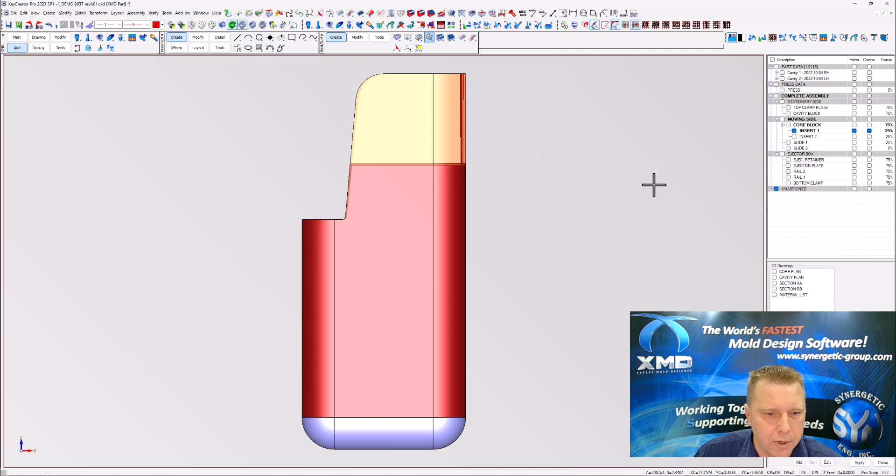I've got this little core insert here. So we're going to use smart water. We're going to add water down the middle of it. You know, it's an insert that needs to be cooled internally. We can't get water close enough around it in the core. So we'll place this right here, and knowing the smart water, I didn't use through smart water, so it stopped short as it should.

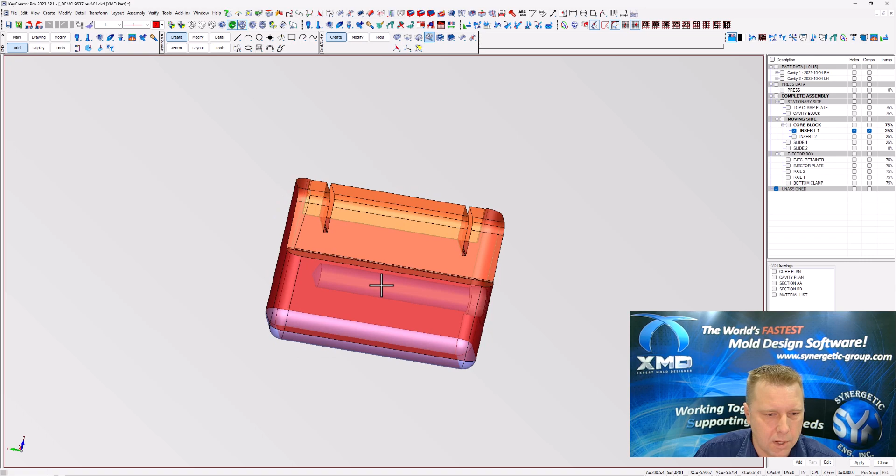And let's check this out. We're going to use a trim command, and when you trim it to the end, it automatically adds a plug because it knows it's a through line now. So now we've got a little water line going directly through that insert. Add the core on.

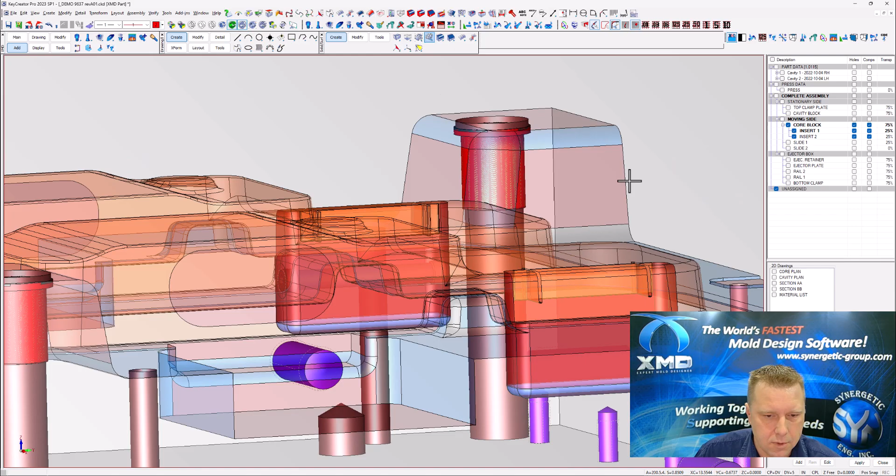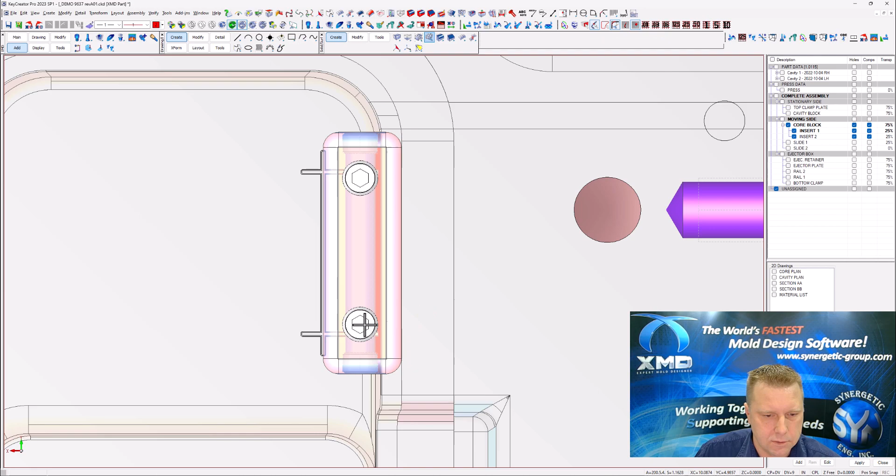Alright, let's come underneath that insert, and we're going to use smart water again. And again, not use through water, we're going to use blind. We're going to place a water line right there and right there to get up in that insert. We'll add some screws in the middle of it later, I guess. Okay, and you can see they stop short as they should.

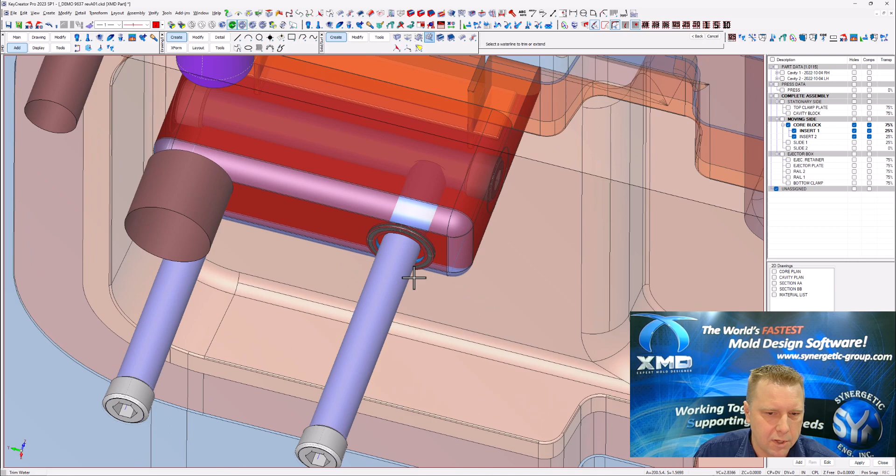But now, here's the new feature. We're going to use trim command, and we're going to force that water line up into the insert. And when we do so, XMD now automatically knows that you need to add an O-ring there. So we've got a nice O-ring. They're going to be completely configurable to the O-ring you want to use.

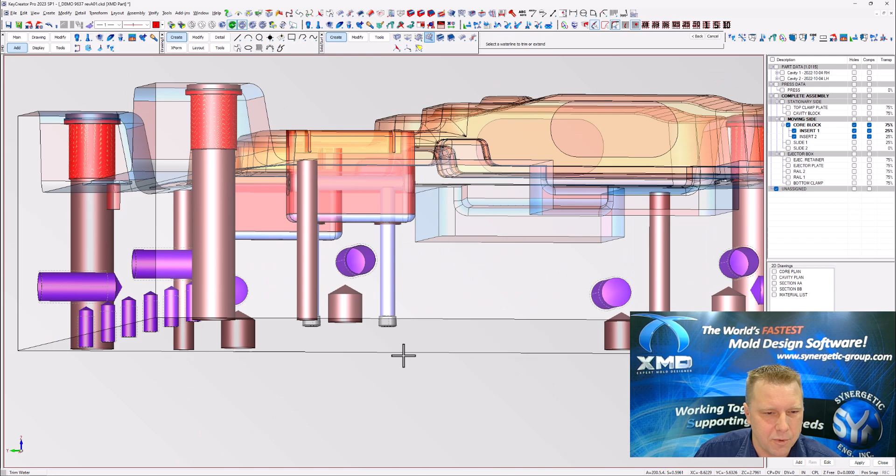Pocket is automatically added for the O-ring. The pocket you can customize to exactly what you want for the O-ring pocket. Of course, it comes ready to use out of the box. You know, automatic O-rings might be a small thing, but I love it. I think it's a great new feature. Development really came through the last couple weeks getting this ready for the show.

So if I just keep messing around, we'll play around for a little bit. We'll complete that circuit. We need an inlet somewhere. Well, let's just drop it down low. Okay, so that'll be our inlet. When I get the other one in, I'll change that to a jiffy later. And the other one will come from the side. Sure. Okay.

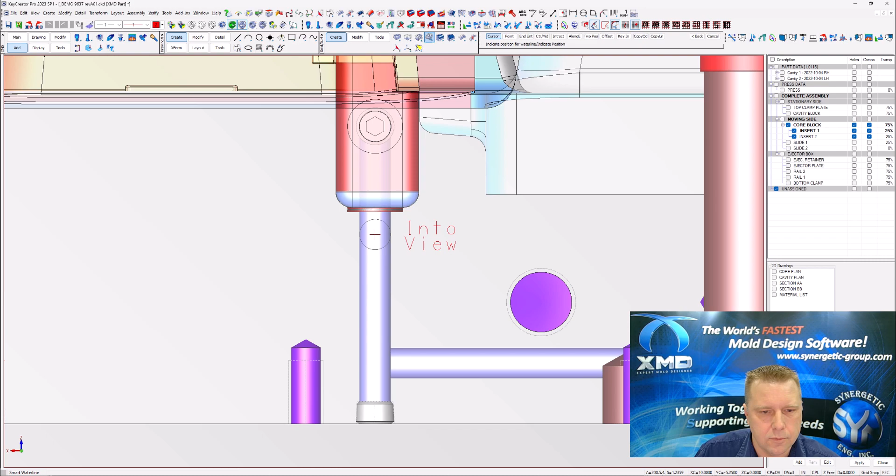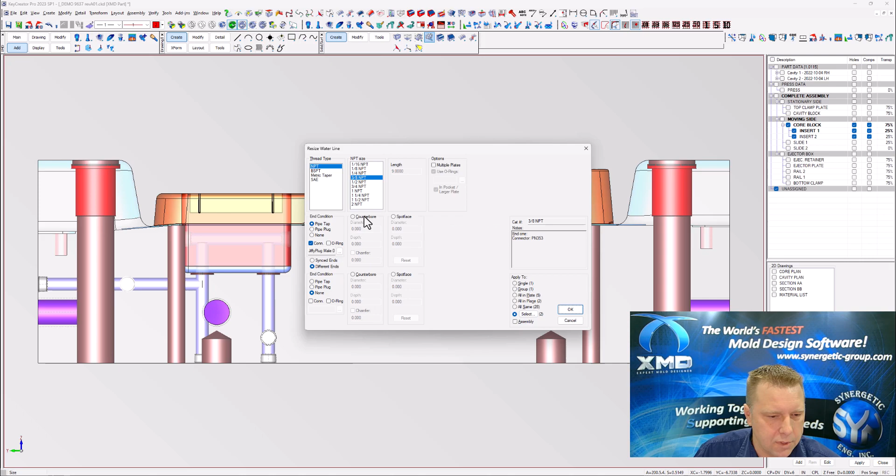Alright, and notice the automatic water, the smart water, automatically self-trims itself to the last water line that it sees. So we got to trim that back in this case. Now we've got the two that we want to put jiffies on. We're going to select them using our scope settings, and automatically they both get jiffies and counterbores. So there, we're all set.